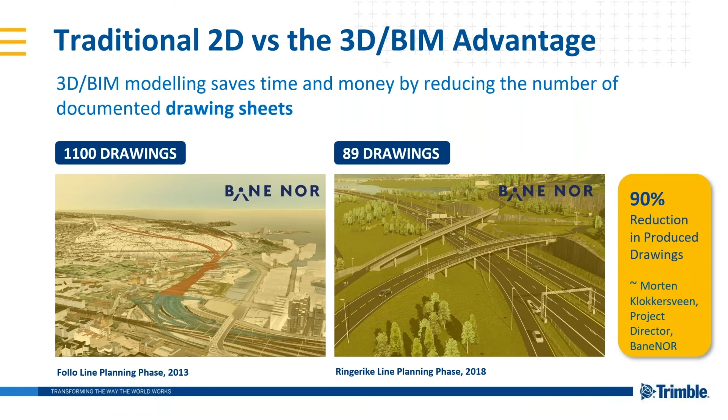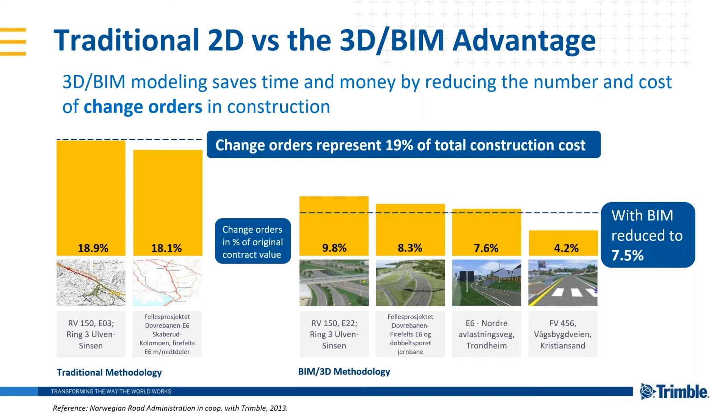So another slide here on the BIM advantage. Change orders are a significant cost of your construction. In our recent reports, we're looking at an average of 19% of total construction costs using the traditional methodology. By applying the BIM 3D methodology, or essentially the BIM workflow, that number on average gets reduced down significantly. If we refer back to that original diagram where we're looking at the cost overruns associated with construction projects, we're able to have a significant impact on that number by simply applying this 3D BIM workflow, generating a 3D as-built, and that's not even touching on the operations and maintenance cost. That's a significant cost for your actual project once it's constructed. This is just the actual construction cost, so you can extrapolate some of those benefits throughout a total project lifecycle.

What we're also seeing, as I touched on earlier, is the accelerating adoption of digital construction in projects here in North America. And that's purely because of those numbers we were just showing you. It's a known fact that applying these approaches are going to have significant benefits both to the owners, to the designers, and to the operators once you've got that project.

So obviously we're talking about the FHWA and the digital as-built EDC6 that we're currently referring to. There's also other resources available. The FHWA Accelerated Innovation Deployment Initiative is there to provide funds, and the program provides funding as an incentive for eligible entities to accelerate the implementation and adoption of innovation in highway transportation projects.

We're also seeing the Secretary of Transportation directed to provide $10 million from within the Technology and Innovation Deployment Program for Advanced Digital Construction Management Systems, consistent with the direction and supportive language in the House and Senate reports. And then we're also seeing AASHTO, which is promoting e-construction nationally for the collection, review, approval, and distribution of highway construction contract documents in a paperless environment. All of this is mainstreaming technology for asset management, electronic as-built drawings, and quality assurance records. So bottom line, there are resources out there, there are initiatives, and there is funding behind them for you to apply these innovative technologies to your construction project.

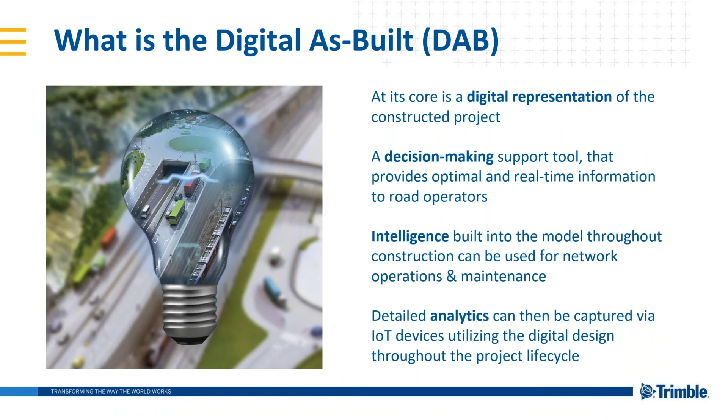It's not just a flyover surface. It's not just a point cloud that doesn't have any data behind it. It's the project itself, and then all of the underground underlying information on utilities and metadata, and we're going to talk about that in a second, that enable that ability to be used in operations and maintenance. And then, of course, inherently, the end goal is to be able to have that information available to IoT devices, to autonomous vehicles, to whatever else you want using that infrastructure, because they're going to be leveraging the intelligence built into that model and be able to extend the life cycle of that infrastructure project.

So why do we want to use a digital as-built? To an owner, it lets them provide a greater level of detail and accuracy, and it gives them visibility into the project as well. It also means that at a contractor level, it empowers them to get better quality for a better finished product. They can do better bids because they've got more intelligent data that they can use for better estimates. And of course, that intelligence flows throughout the construction project as well. We're going to touch on that in a few more slides. And of course, we're talking about the as-built.

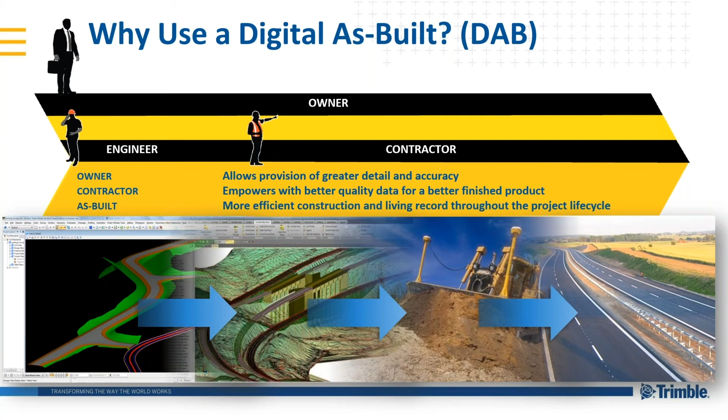So you've got more efficient construction technologies that are using that 3D model throughout the whole life cycle, so that when you do get to that digital as-built, it's got intelligence built into it. It's also becoming a living record throughout the project life cycle, because intelligence from the field is fed back into the model, so you're able to utilize that once it's been constructed.

So how is the digital as-built used in construction? One of the most simple applications is location and versioning of that model. In other words, how do we make sure that the machines actually out there constructing the project are using the latest model, or using the model everyone else is using, versus the previous way they would have to run out there with USB sticks.

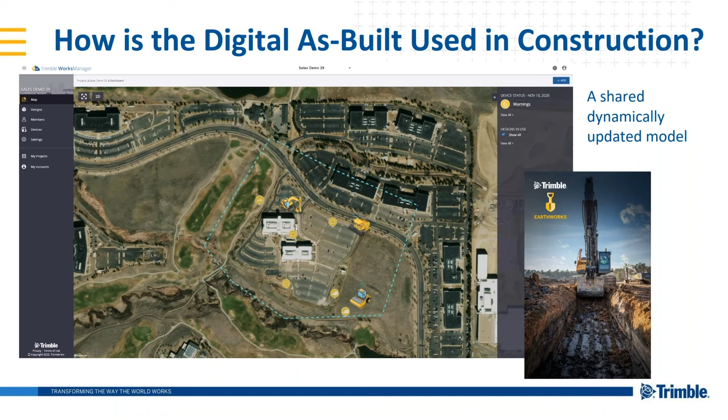What we're able to do now via the connectivity is make sure all of the machines have the latest version, everyone is working off that latest version, and you're able to ensure that by checking you're able to disseminate that very easily because of the connectivity. Not only that, you're able to update the model in the office, and that office to field connectivity enables that digital as-built to become that living record, because those changes can then be sent out to the field with much greater ease. But that also facilitates communication back to the model from the office, from the field itself.

So how else is the digital as-built used in construction? Visualization is a very powerful tool, and being able to see that in the field is something that currently really isn't available. If you're out there trying to construct a project and you've got a 2D PDF and you're trying to visualize the 3D model, obviously that's very difficult to do. But with the tools we have in place now, there's very sophisticated visualization tools where we can actually be out in the field and actually be seeing the same model that the machines are using to construct a project.

And in this example, one of the simplest examples of the beauty of having that information was they were able to see that there was this structure or embankment that was actually extending much further out into the roadway than they thought, based on their designs. As you can imagine, seeing a design on a computer screen has a lot of obvious restrictions, but being able to see that same digital design with the intelligence behind it in the field means you're much more empowered in the field to be able to see that, make changes, and observations made in the field can then be modified on the design.

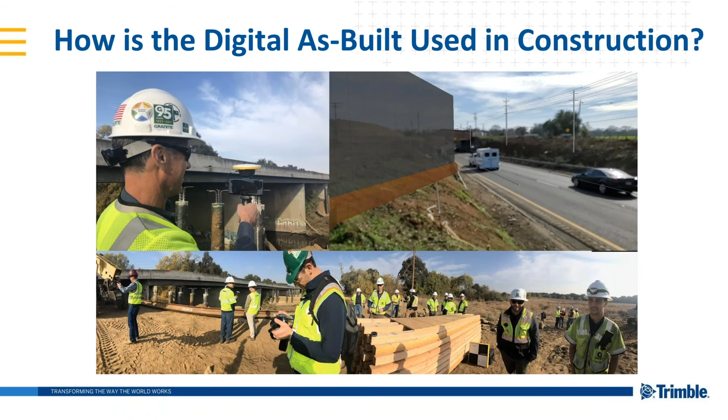So we want to talk about the intelligent as-built as well. I've touched on it a little, but what that means is that data from the field, or data from the project as it's been constructed, is being fed into the actual model itself. Now, we can only really do that via connectivity, but what that means is that you've got the machines out there not only actually creating and constructing the project, but they're actually using sensors on the blades of those machines to generate surfaces, which are being fed back into the model itself.

So you're able to use that for progress mapping, for monitoring of a project as it's being constructed. But the beauty of that is all of that data intelligence is being gathered and entered into this 3D model, which can then be used for your operations and maintenance. So there's a win-win for the construction itself, but then also for the actual as-built too.

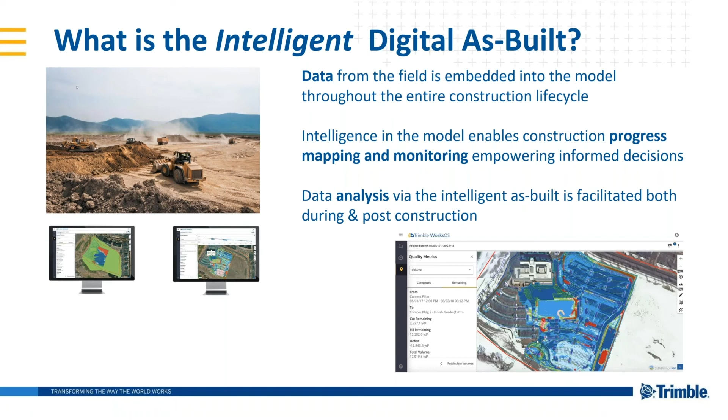So just to elaborate a little further on that, if we're actually using that 3D model in construction, things such as compaction values can be recorded as the project is being essentially compacted. And again, those compaction values are going to be incorporated into that 3D model, or that digital as-built. Another very simple example is things such as pavement thickness.

At the moment, if you've got a project out there and you're going to mill a road, you have very little idea what the depth of that pavement is to get to a solid base. So you don't want to over-mill, because obviously you'll get down too far and you could not have a strong enough structure to support the overlying material.

But what if you could have access to that pavement depth and understand that when you're actually out there doing maintenance or operations on an existing project? You know exactly how thick that pavement is, so you can feed that 3D data into your milling machine to know precisely how far it can go down. And that's just one simple example of that.

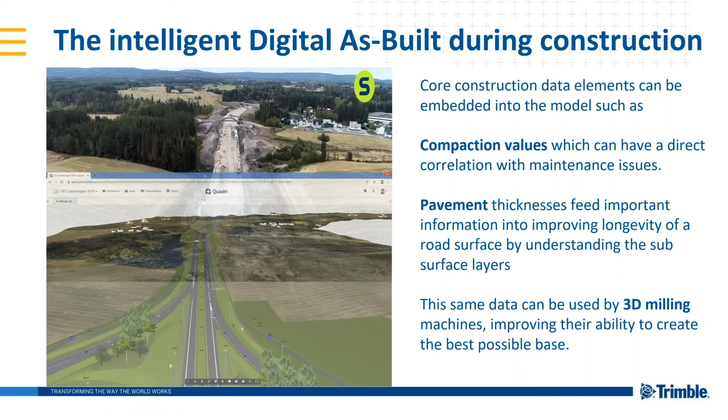And that's just one advantage of recording that information, not only the pavement depth, but of course you can have all the underground utilities and asset information embedded into that. So there's safety tying into that as well. Again, the benefits of being able to utilize that data during construction.

As far as post-construction, let's say you've got the project constructed, you've got your buildings in place, you've got all of that underground infrastructure in place. You're able to capture that information as part of the model.

The beauty of that is when you go to do your operations and maintenance, or when you go to dig up something, you know precisely where all that utility information is. There's metadata built into that, so you can tap on it and see exactly what that utility is and its condition. If you've embedded that information, if it's been visualized or touched with a pole, you know exactly the elevation and exactly the condition of it. That can all be embedded into it.

One of the things that, if you were at the FHWA EDC summit last week, they talked about capturing data once and reusing it many times, and that couldn't be truer here. Once you have that digital information, you don't have to go potholing or running GPR to find out where your utilities are. All of that underlying data is built into that 3D model.

That can also be used for very powerful visualization tools, and that's exactly what we're looking at here. But they're not just pretty pictures - there's information embedded into all of these data sets that can be utilized as part of that operations and maintenance aspect.

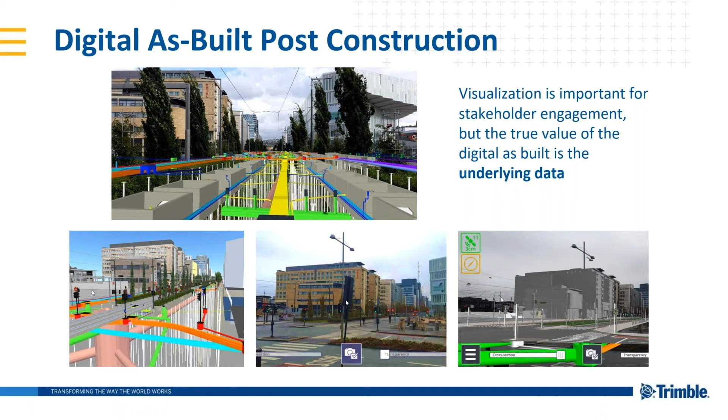We also see the digital as-built as a data aggregator. So how do we better utilize the data-rich point clouds that many DOTs are capturing around the country? What they're doing is capturing highly accurate digital as-built information of assets and utilities, sending equipment down the road to capture those point clouds.

But what if we could overlay those point clouds with your new digital design? There's power in that, because you can see how they're interacting with each other, look for clashes, and that truly is the convergence of your physical and digital worlds - having your digital design and as-built information combined in one location. Being able to see the intersections and analyze how those models interact will help with future designs as well as once the project is constructed.

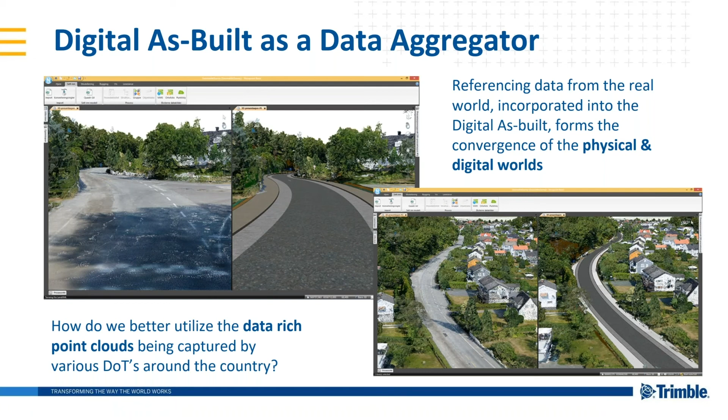We talked about connectivity facilitating an informed workflow. Let's say we wanted to select a model and be able to visualize that data in the field. This is the digital as-built, with some of the information incorporated into it - the intelligence built in that's being used through the construction lifecycle.

What if we could actually visualize that in the field and use it as part of the construction project? This is a real project, leveraging our technologies and European expertise to show a project where all of that information is built into a model. It's all been mapped - we have the utility information built into the designs, with metadata associated with all of that.

And the ability to actually visualize that in the field means we can take measurements and do observations. The beauty of this is, because of that connectivity, the devices in the field are referencing the data stored in your digital as-built. This isn't just a single snapshot - it's part of that living model we talked about, and they're able to visualize and interact with it, improving the efficiency of an actual constructed project.

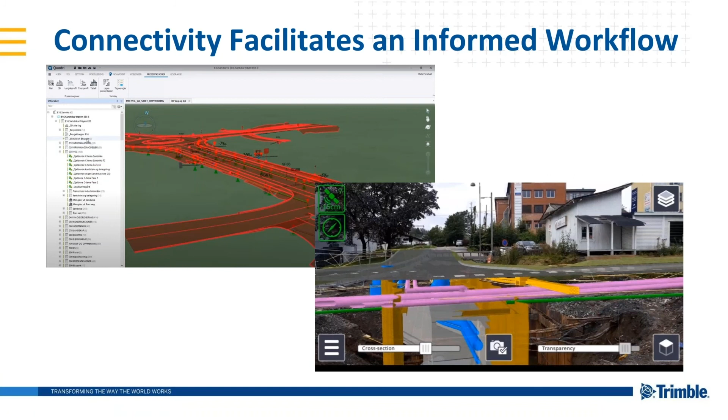And of course, all of that then gets bundled into your digital as-built once the project is constructed. So how do we get there? How do we achieve the digital as-built? That's really the last part of this discussion.

Trimble has been building out their technology portfolio around what we're calling our connected construction vision. Fundamentally, it's built around using a 3D model at the center, and ensuring that every single piece of equipment and every interested entity has access to that 3D model. By doing that, you're able to disseminate that model throughout the entire construction lifecycle - the same model used in planning and design, in your construction phase, and then in maintenance and operations.

It can only really do that through the tools we're talking about here, through connectivity, by having machines read and capture data from the field and send that back to the model. All of that feeds into the actual digital as-built, which becomes your resource for operations and maintenance.

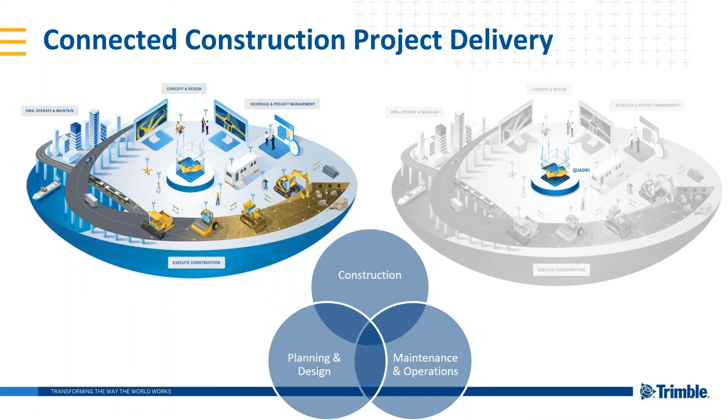So let's consider a standard BIM workflow, and the tools required to get there, which is really what Trimble is building out with their technologies. In a standard workflow, we need to map your existing conditions, bringing in basic terrain models, point clouds, whatever you've got.

You then need to design your new infrastructure, and then visualize that. Very sophisticated visualization tools enable that decision-making process, because you're able to visualize it not only in the office, but also out in the field.

Contractors then take that model, build from it, and use it for planning, stakeout, and machine control. But they're also capturing data from the field that gets fed back into the model.

If changes need to be done, this ties in with connectivity: who's going to make the change, who's going to approve it? You need to be able to update those discipline models based on feedback from the contractor or from the field.

That's really what starts to create the truly intelligent as-built. Because all of that intelligence has been built into the model, it becomes a far more sophisticated tool that can be used for operations and maintenance, for IoT devices, and for autonomy.

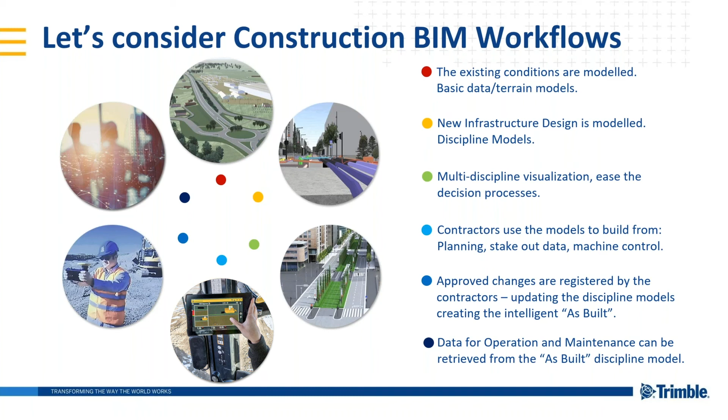Even at its core, just being able to use that model to know where your road parameters are, where all of your utilities are - having access to that provides a lot of value for sure.

So we're talking about the tools Trimble is helping build to get you there. One of those is building a sophisticated common data environment for all infrastructure stakeholders - that needs to be a single source of truth.

The visualization we looked at before needs to be able to show that data and ensure it's the latest version, with everyone having provided input to it. That can really only be done with an object-based 3D model.

What that means is you're facilitating continuous data connectivity - you're only sending updates, not a file-based approach. You're able to constantly update that model with the latest information from design or from the field, and the beauty is you're not sending entire models or parts of a model.

One of the things we've understood as important is being software agnostic. We're looking at platforms that enable stakeholders to maximize the use of their existing hardware and software - we don't want to replace that, we want to enhance what you're already using, leveraging your experience to build that intelligent digital as-built, without locking you into a new format.

So why do we want a shared model? We talked about this living model approach. The benefit of having a shared model is that it's the same model that goes throughout the whole life cycle - the same model used for planning and design.

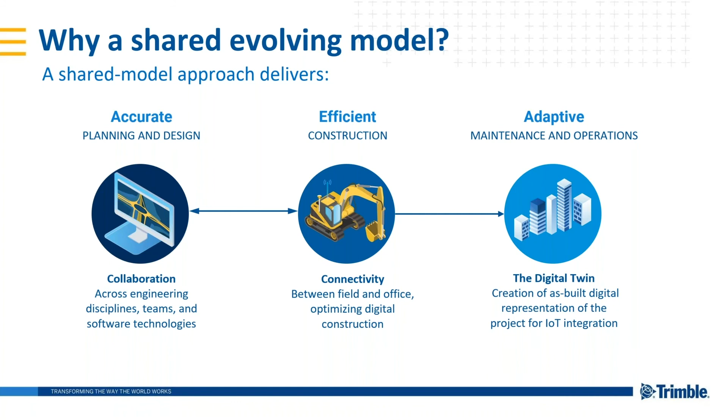Being able to ensure machines are using the latest model, with more intelligence built into the tools on those machines, leads to a better product. Having that final design, with so much more intelligence built in, becomes the digital twin - basically your digital as-built used throughout the entire process.

So we want to talk about facilitating data flow. The benefit of that means contractors get greater insight into the project and can provide input on that latest design. From an owner standpoint, even if they don't want input in the design, they just want to see what's happening by having access to tools where they can see the data, who's touched it, when it was modified, and if something goes wrong, identify where that file came from, while also being able to control who sees what and when.

There's really lots of value in facilitating that data flow, and lots of the Trimble tools we're creating now are built around this seamless data flow between office and field, but also between devices and software.

So that's touching on our software agnostic approach. The benefit of using a software agnostic approach is it removes the barrier of proprietary formats. Having an agnostic approach also means you need to be able to get that data from your existing programs, so we have software connectors that enable transfer of data with no loss of data fidelity.

In other words, you can make changes in your design software that's effectively communicated back to your single source of truth, your common data environment, which is what everyone else will be utilizing. The benefit is you get to keep all of your software and designs in your own package and leverage that experience, and you can rest easy knowing all that data is in one location.

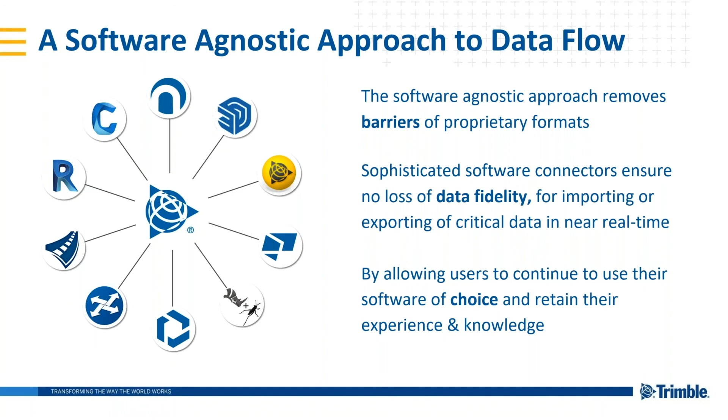So we talked about connectivity enabling effective communication. It can only really do that through multi-user collaboration on a single model. All of those connectivity aspects we discussed before, access to the model across multiple mobile devices and platforms, leverage all of the information stored in that single source of truth. It's the communication between all of those parties that really helps facilitate effective collaboration and communication.

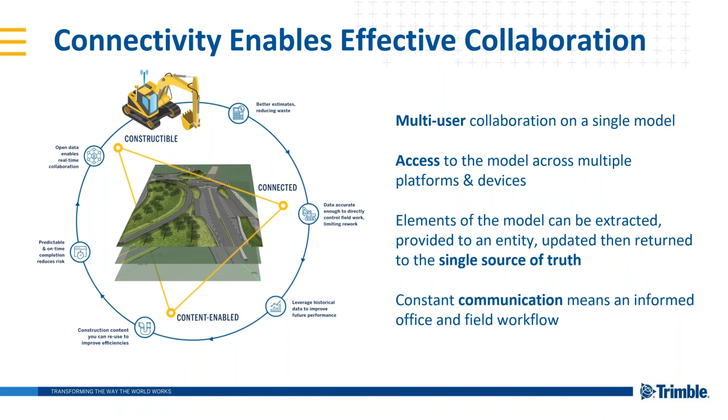We're getting close to the end of our presentation, but of course the end goal here is having a digital as-built that can be used for your operations and maintenance, and as touched on before, it can only really do that if it's got all the intelligence built into it.

The benefit of having a model that has everything tied together means everything is connected, so you know exactly where your bridges start and your roads end. That's also what's utilized in actual operations and maintenance, and what your IoT devices are leveraging. The result is a better understanding of the constructed project, meaning reduced downtime and increased efficiency of use.

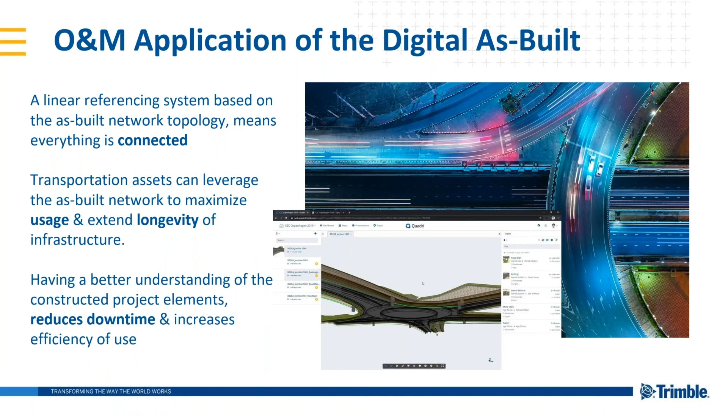So a quick wrap up here, the benefit of the digital as-built: continuous visibility into the model, collaborative elements, field connectivity, controlled access, being able to see who does what and who has access to what. The 3D model integration, that single source of truth, having everything together in one location with complete design information, all controlled by that common data environment.

So there's a lot of value in having everything together in a digital as-built. This presentation was really meant to give you a teaser of what we're doing. We're going to have follow-up presentations as well, which Doug will touch on in a second, but hopefully this gives you an idea of the benefits of applying a 3D construction workflow, because of that 3D digital as-built and all the intelligence associated with it, and more importantly, how it relies on everything being tied together and connected, utilizing that 3D model.

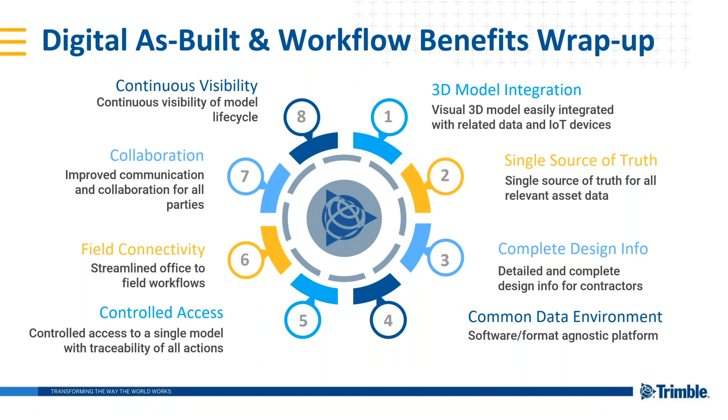So I think that's about it from my end. If you're there, Doug, I believe I can hand this back over to you.

Take a breath, my friend. Have some water. That was really intense, and you did a great job.